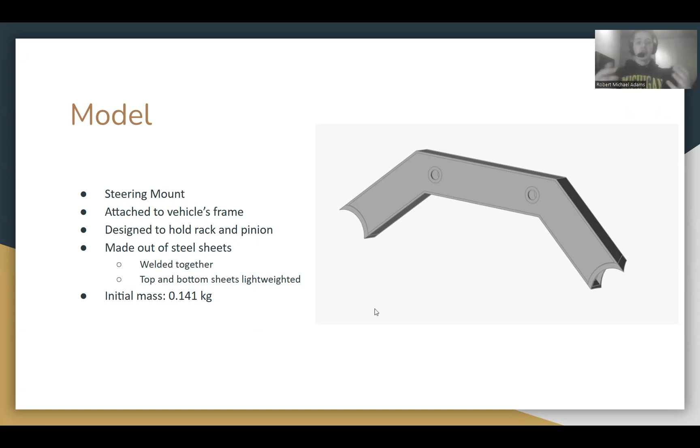This material is AISI 4130 steel. For setting up the model, I applied the load, a force at either end, either hole, in opposite directions. So there's a force going towards me and a force going into the screen. That was what I believe simulated a cornering load.

And there are two symmetric shape controls, both at the front side and at the bottom side. There's no GIF here, but there's a bottom side to the steering mount. Each symmetric shape control has three planes that fully constrain the symmetry of the optimization and the lightweighting, so that the parts that we'll be making are very easily manufacturable and simply supported. And also, the design space is partitioned so that I left some thickness on the outsides.

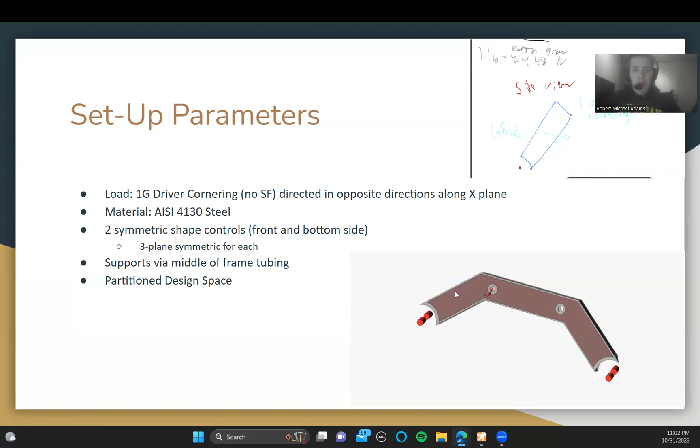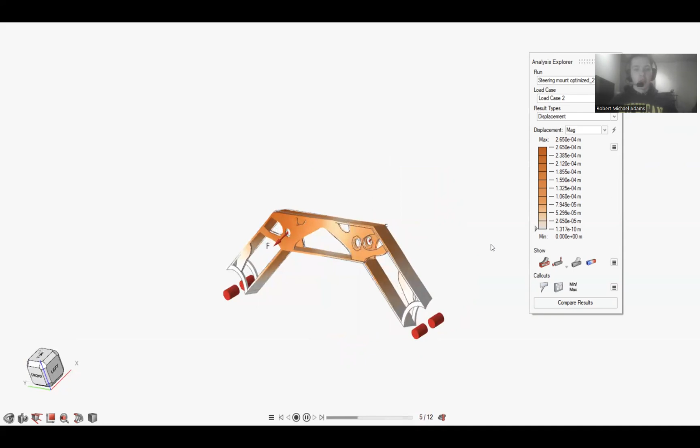Now here are the results from optimization. As you can see, it's very symmetric. Topology was in the middle of the smoothness, and I optimized for around 25-30% mass lightweighting. And here's an analysis for displacement. As you can see, these loads displace the mount slightly, but it's not that much under this load. It's mostly in the sides that are lightweighted.

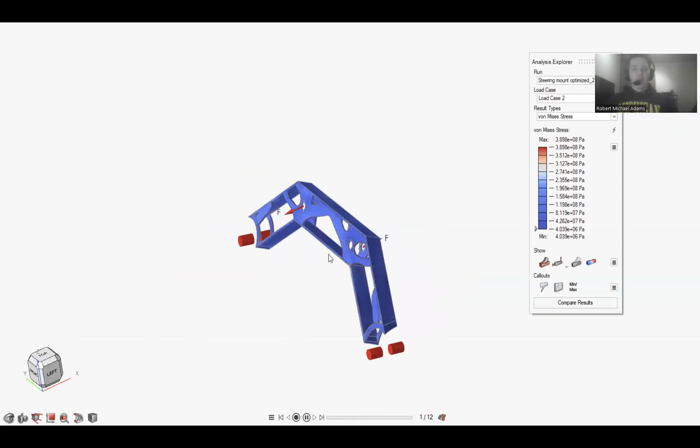Now for the von Mises stress. The von Mises stress is overall pretty low, since it incorporates most of the principal stresses, which is a good sign. So the final mass of this subsystem assembly was 0.084 kilograms, which means there's a 40.4% reduction in mass.

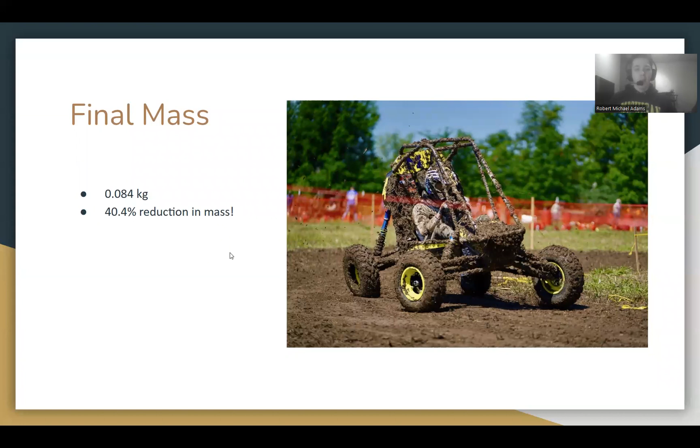Some room for improvement is more accurate FEA simulation. For example, trying to reduce that displacement while keeping the mass the same, figuring out what structure would do that. And also lightweighting on the other steel tab portions, the portions that I talked about earlier that I wasn't including as part of the design space, but could include those and then connect them together with the plates in the top and make sure that we can actually make these tabs and weld them together.